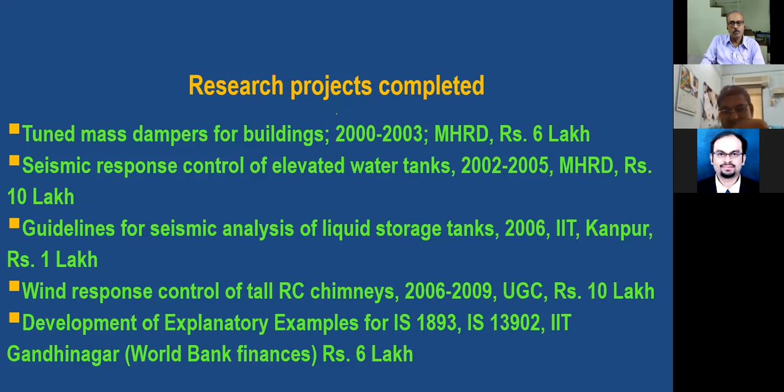He has completed many research projects too, which consist of tuned mass dampers for buildings in 2003 under MHRD, then seismic response control of elevated water tank, guidelines for seismic analysis of liquid storage tank, wind response control of tall RC chimneys, and development of explanatory examples for IS 1893 and IS 13920, from IIT Gandhinagar. His research interests are earthquake analysis of structures, tuned mass dampers, stability of shells, wind response of tall chimneys, elevated water tank, railway bridges, etc. He also completed consultancy projects such as design of a telephone exchange building at Bangalore, vibration testing for GI valve for nuclear units, NECO Industries, Nagpur, structural design checking of water tank for Government of Maharashtra, etc.

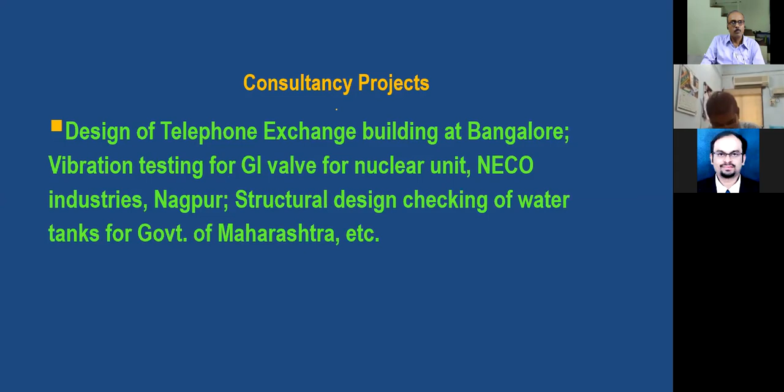He has membership with the Institution of Engineers, Indian Society for Earthquake Technology, Indian Society for Technical Education, Indian Association for Computational Mechanics, Indian Association for Structural Engineering, and VRC Alumni Association as well. Other achievements: he is a member of the Indian Standard on seismic design, as well as a member of the UG Admission Committee. He was a member of the Bureau of Indian Standards committee, awarded the INAE Fellowship for Mentoring Program in 2008-2009, and is an executive committee member of the Indian Society for Wind Engineering. He is in charge of UG Admissions and a member of the Core Committee of Central Counseling Board, VNIT Nagpur.

He was also head of the Applied Mechanics Department from 2010 to 2012. He was Dean Academic at VNIT from 2013 to 2016. He was also Professor in charge of the Student Mentor Program from 2016 to 2018. We are glad to have you with us, sir. So today's speaker, Dr. O.R. Jaiswal sir, and I would like to request sir to please start the session.

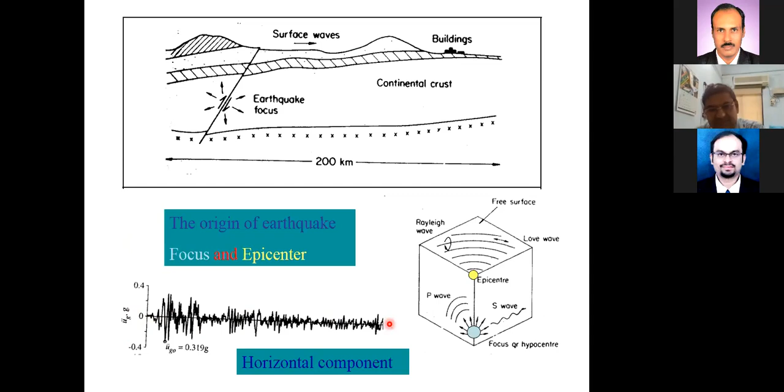This ground shaking, for our convenience, for engineering purpose, we divide into three components: two horizontal components and one vertical component. The horizontal components are more critical. Vertical component is also important, but the fact remains that dead load and live load are the loads in vertical direction already. So structure has already been designed for certain loads in vertical direction, that is dead load and live load.

Is it okay? Am I audible? Yes, sir, you are audible. It is very clear. Okay, good, good.

So already in vertical direction, we have dead load, live load. And in terms of acceleration, I can say that in vertical direction, structure has already been designed for 1g acceleration, because dead load is nothing but mass of the structure into 9.81 meter per second square. So over and above 1g, if there is some more ground shaking in vertical direction, the structure should be reasonably able to sustain it. That is the reason why we say that horizontal components are more critical to us than vertical component. But for long span structures, vertical component is equally important.

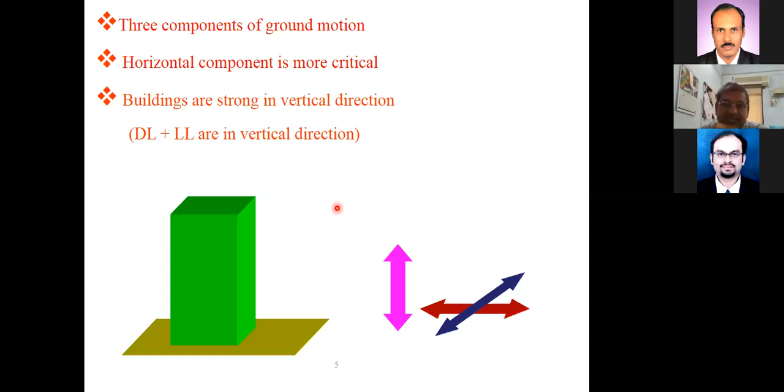So earthquake load on a structure is nothing but mass of the structure into acceleration. Which acceleration? Acceleration due to ground shaking. So if ground shaking is in horizontal direction, then FH, horizontal force acting on the structure, will be acceleration of the structure into its mass. This acceleration will come because of ground shaking. So we have to design the structure to reasonably sustain this much horizontal load. Since ground acceleration will be changing with time, structure's acceleration will be changing with time, this force will be dynamic in nature.

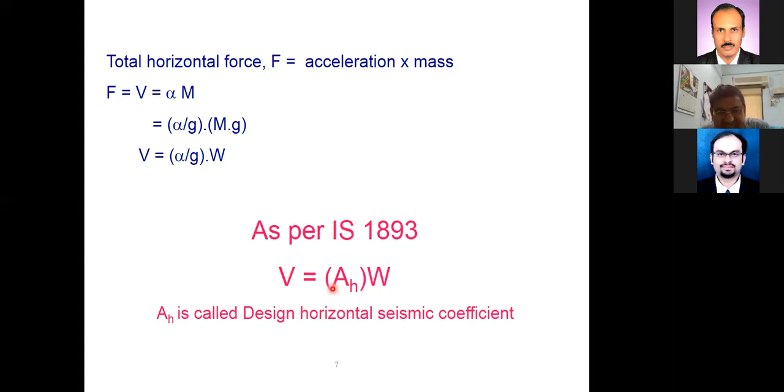So 1893 helps us in calculating this earthquake force which will be exerting on the structure. Now things are very simple. Newton's second law of motion, mass into acceleration. We divide acceleration by g, multiply mass by g. Mass into g is W. Alpha by g is a non-dimensional parameter. Alpha is acceleration, g is also acceleration. This same formula IS 1893 has given, that total earthquake force acting on a structure is nothing but, instead of alpha by g, they have written Ah into W. And this Ah is design horizontal seismic coefficient.

Since code has to be very general, that's why this Ah consists of three parts. Z by 2, that is zone. I by R is design philosophy. I is importance factor, R is response reduction factor, and Sa by g is structural characteristics. So this is given in IS 1893 part 1.

Now this IS 1893, its brief history is like this. First time it was proposed in 1962, then it got revised. First revision in 66, second revision in 1970, third revision in 75, fourth revision in 84, and fifth revision came in 2002.

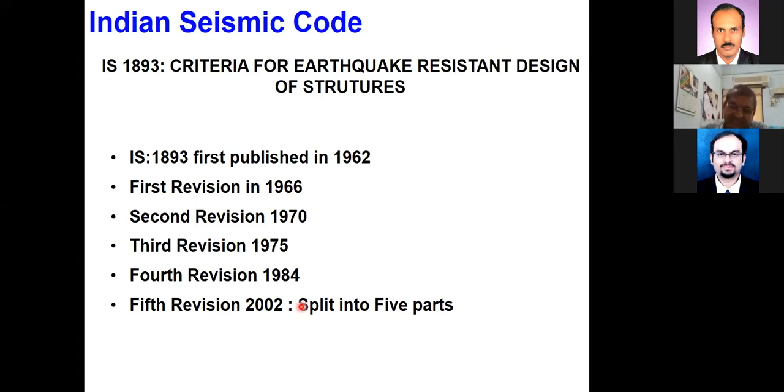And in 2002, this code has been split into 5 parts. For different structures, there are different parts. Part 1, which contains general provisions and buildings, was first published in 2002 and subsequently revised in 2016. Liquid retaining tanks, the code which we are going to discuss today, has been published in 2014. Bridges and retaining wall, part 3, has been published in 2015.

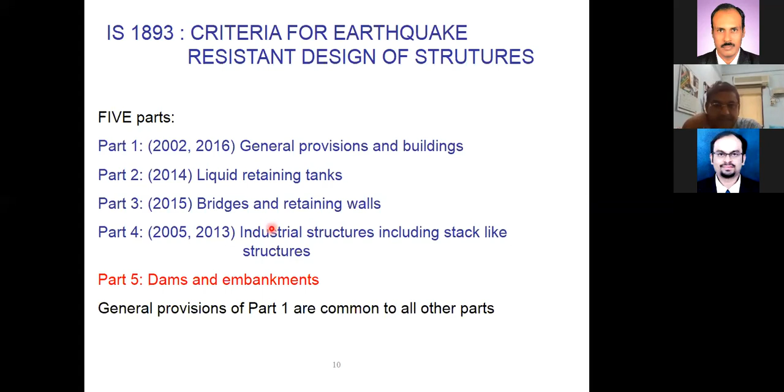Part 4, which deals with industrial structure, was published in 2005 and revised in 2013. Part 5 is written here in red color. It is yet to be published, but its draft is under circulation. In part 1, it's general provisions. They are common to all the codes. That means seismic zone map will be common to them, response spectra will be common to them, load combination, damping, those things will be common to all other parts. So while we are discussing part 2, we will take seismic zone map, response spectra, load combinations from part 1.

And in part 2 now, what we have to discuss, or what it has to contain separately for liquid storage tanks or for water tank, is importance factor, response reduction factor, and how to handle the sloshing or how to handle the liquid modeling. Those are the additional issues which we have to handle in this. So for buildings, we have this formula. In fact, this formula is common for all structures. So SA by G comes from response spectra.

To use response spectra, you should know time period of your structure. So once you know time period of your structure, then depending on which soil your structure is resting, you can read the value of SA by G. For building, time period is 0.09 H by root D, for building with infill. For bare frame, there are different formulas. Z comes from zone map. Zone map is given here. I is importance factor, R is response reduction factor.

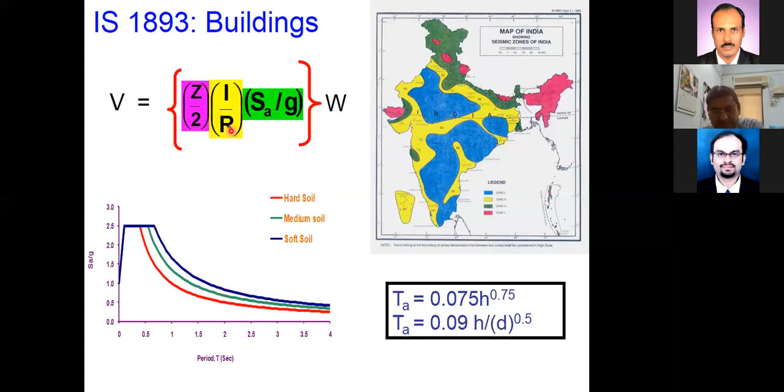Then for building, whatever total force we calculate, it is distributed to various floors in proportion to, or let us say in second order distribution or parabolic distribution, Wi Hi square, where Hi is the height of various floors from the bottom level. So that is how for building it is calculated. So for building, if somebody is using equivalent static analysis, things are like this. First you calculate time period, then go to response spectra, calculate SA by G, depending on that find out the Z value, depending on importance and characteristics of the structure get I and R and obtain this V or VB base shear, and then distribute vertically to various floors.

If somebody is doing response spectrum analysis, then first you have to model a discrete model of this building, and then find out the natural frequency from modal analysis. For different natural frequencies or natural periods, calculate the value of SA by G, and then calculate earthquake force at different levels in different modes, and then combine them using any modal combination. So two methods are given: one is equivalent static analysis, one is response spectrum analysis, for buildings. Now we come to part 2, that is for liquid storage tanks.

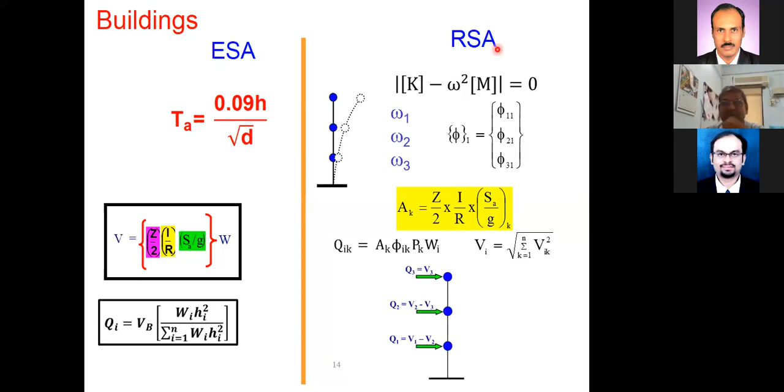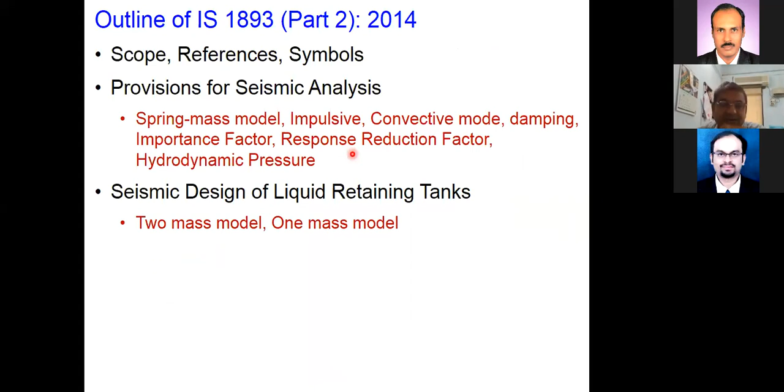This is the front page of this code. Now in part 2, what has been given: first it deals with the spring mass model, that is how to model the liquid, how to handle the liquid. During ground shaking, liquid will slosh, so convective mode. Damping, what will be importance factor for water tank, what will be response reduction factor, and hydrodynamic pressure, those things are given. Then there are some miscellaneous provisions like buckling of shells, buried tanks. And then there is a section on aesthetics. Water tanks are visible from a distance, so they should look reasonably good. And then there are some clauses given on quality control in RC tanks. Because they are important structures, some provisions are given here so that minimum quality of construction can be ensured for RC tanks.

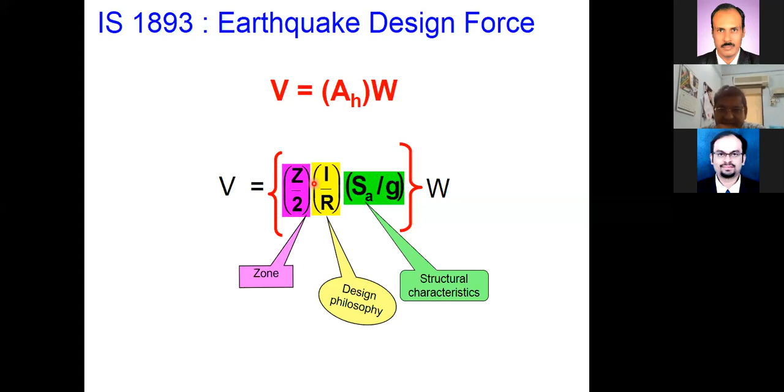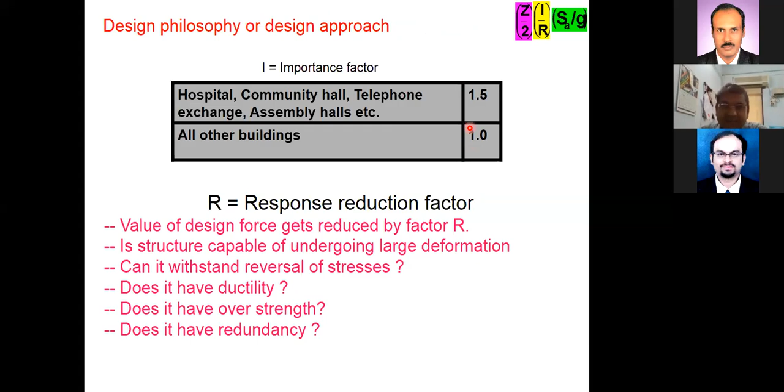Those are given. So earthquake design force, this we have seen. Now for buildings, we have seen I is 1.5 for important buildings, and it is 1 for other buildings. There is 1.2 also for community buildings with more than 200 people staying. And response reduction factor R for building, we have seen there are 2 values of R. For RC special moment resisting frame, that is those frames which follow 13920, R will be 5. If RC frame doesn't follow 13920 but follows only 456, then R value will be 3. But then for other types of brick masonry structure and other things, lower and lower values of R are given.

Now for water tanks, is it visible?

Yes, sir. Yes, sir. Okay. Because there was some change here, so I thought.

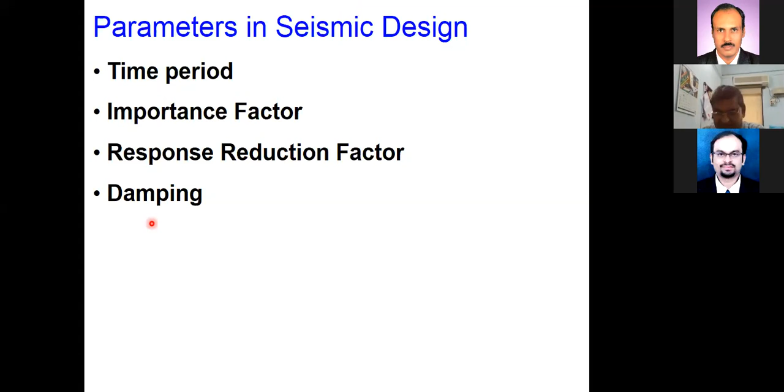Okay. Now for water tank, what will be the issues? Time period. Now 0.09H by root D can be used for water tank? It is only for building. Okay. Then what will be the time period of water tank? How to calculate it? Importance factor, response reduction factor, and damping issues for water tank.

So when water tank is subjected to ground shaking, liquid will slosh. Okay, so sloshing, you have to see how to calculate sloshing mass. Okay, then how to decide R values.

Now IS 1893 Part 2 has been published in 2014. Okay, and the document is largely based on the IITK GSDMA guideline. IITK means IIT Kanpur, and GSDMA means Gujarat State Disaster Management Authority. They together were involved in developing some seismic code-like documents, or guidelines. So one such guideline was devoted to water tank.

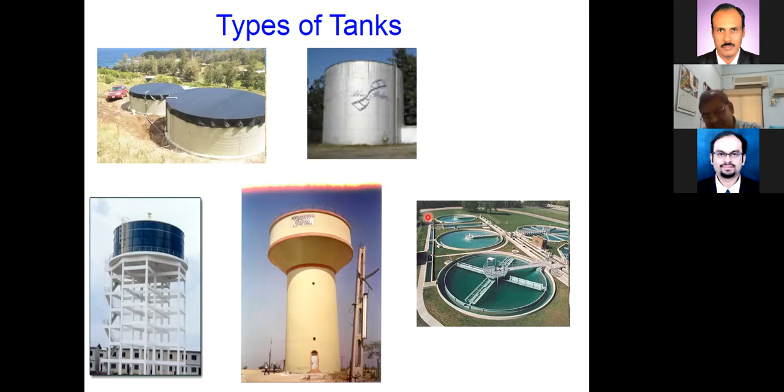Now, various types of tanks which are considered here: ground supported RCC tank, ground supported steel tank, elevated tank on RCC frame, elevated tank on shaft, and underground tanks. Largely these are the broad types of tanks which we have to address. Ground supported tank can be RC also, steel also. Elevated tank can have RC frame staging or steel frame staging. It can have RC shaft staging, and then underground tanks. Underground could be steel tank or it could be RCC tank also.

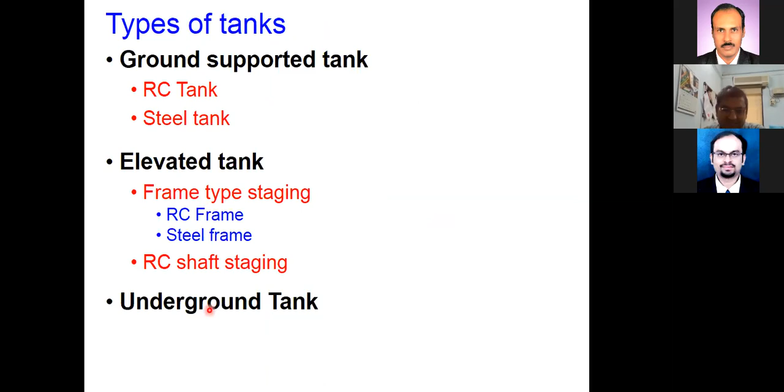Now, sloshing. Okay. So when there is ground shaking like this, the liquid will slosh. Top portion of the liquid will slosh. Now, because of this sloshing, what will happen? The wall will be subjected to dynamic pressure, sometimes this side, sometimes this side. So pressure on the wall will be dynamic in nature.

Okay, when there is no shaking, still there is a pressure on the wall, but that is hydrostatic pressure. But once there is a shaking, and the liquid sloshes or shakes, the pressure exerted on the wall will be hydrodynamic. In static condition, it is hydrostatic. So this is hydrostatic force, it linearly increases. And if the tank is circular, pressure acts in all directions, so the net summation of this pressure in any direction will be 0.

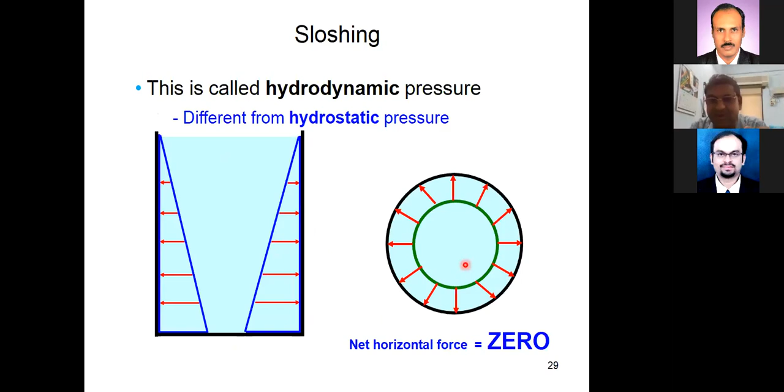So a static tank, let us say a water bottle kept on the table, is stable, because though there is a horizontal pressure on the wall, the horizontal pressure is in every direction. So it balances each other. But as soon as there is ground shaking, suppose the ground goes in this direction, the entire liquid will get pushed in this direction. The wall here will be subjected to additional pressure, and the wall on this side will be subjected to lower pressure. So once there is ground shaking like this, there is a hydrodynamic pressure on the wall.

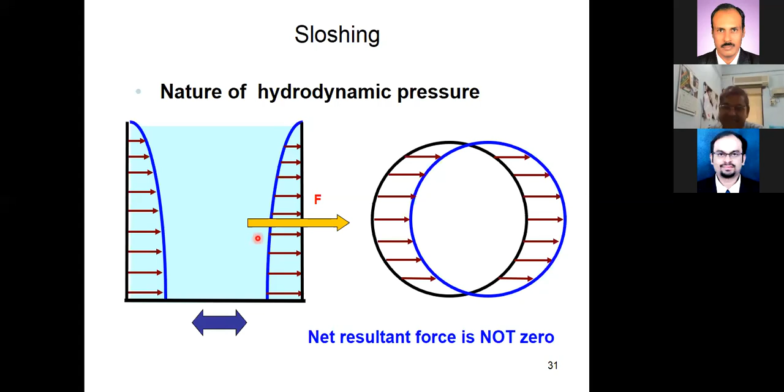If you take the summation of this hydrodynamic pressure, F, this is the force which will act on the wall because of the liquid. This is the pressure distribution in plan. Pressure at this 90-degree angle will be 0, and it will be maximum at this point and this point. So when there is shaking, the net horizontal pressure acting on the wall, its net summation won't be 0. So what happens when there is ground shaking? Liquid will slosh. Now, how much liquid will slosh? That we have to decide. Sloshing liquid is known as convective liquid, and there is some portion of the liquid which doesn't slosh. It remains like a rigid liquid.

It vibrates along with the wall. That is known as impulsive liquid. Okay, now this is water, let us say. Some portion is sloshing and the rest of the portion is not sloshing. Had this tank been filled with ice, there would not have been any sloshing. Then everything would have been impulsive. Ice would have moved along with the tank wall.

But since the shear resistance of water is 0, some water moves relative to the tank, okay, and this portion will slosh. Now, what we have to decide from an earthquake design point of view is how much liquid will slosh and how much pressure it will exert on the wall. Similarly, how much will be impulsive liquid and what type of force or pressure it will exert on the wall.

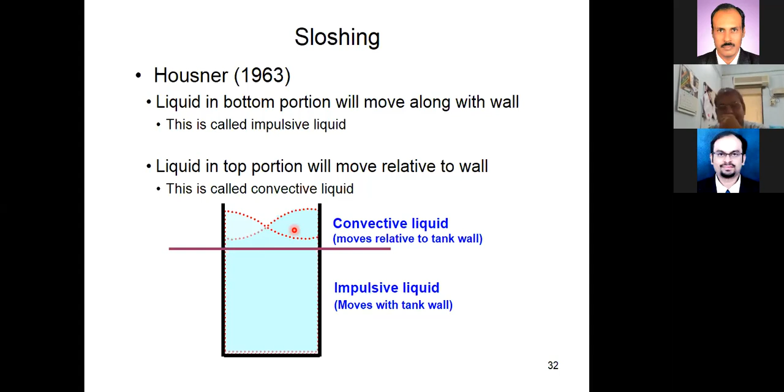Way back in 1963, Housner proposed a theory for this. Based on Euler, based on the Bernoulli equation of liquid and other things, they calculated how much liquid will go under sloshing and how much liquid will remain impulsive. So impulsive liquid will exert pressure something like this. Pressure increases as you go to the bottom. For the convective part, there will be more pressure on the top, and as you go to the bottom, pressure will reduce. So qualitatively, impulsive pressure distribution will be like this, and convective pressure distribution will be like this.

So these two liquid parts we have to calculate. What Housner proposed was that the total liquid mass M will get divided into two parts. One is MC, convective mass, and second is MI, rigid mass. Rigid mass means the mass which will vibrate along with the tank wall, and convective means the mass which will vibrate relative to that, the sloshing mass. The sloshing mass is attached to the wall with a spring, so there will be relative displacement, whereas the impulsive mass is attached with rigid rods, so it will move along with the wall. There will be some height at which MI and MC act.

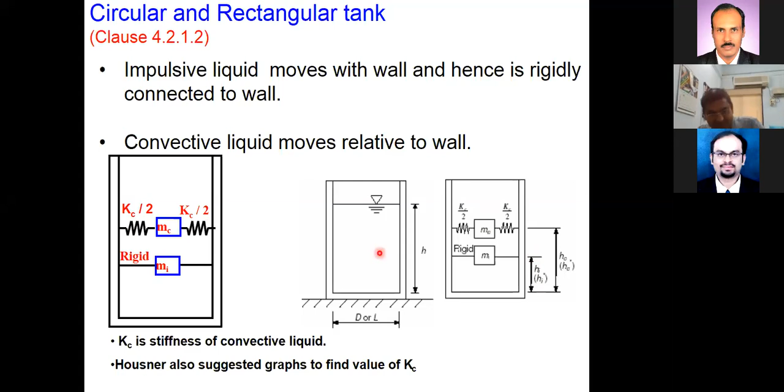This height will depend on where the resultant of impulsive pressure will act and where the resultant of convective hydrodynamic pressure will act. Now with all those calculations which Housner has done, some very simple charts have been proposed. What are these charts? H by D is on the x-axis. H is the height of the liquid, D is the diameter of the tank for a circular tank, and this solid line is MI by M. This dash line is MC by M. So if your H by D is 1, then you will have this much MC by M value, and this much value of MI by M.

However, in the IITK-GSDMA guidelines, a formula for MI by M is also given. This formula was derived by Housner. So if somebody is having design Excel sheets, you can directly add these formulas, so that for a given H by D, you will directly know MI by M and MC by M.

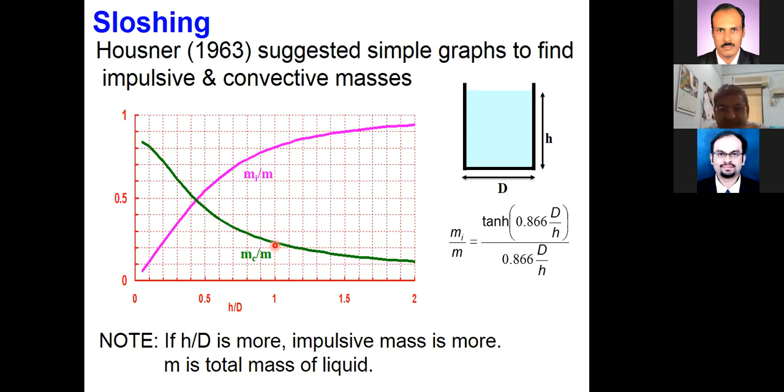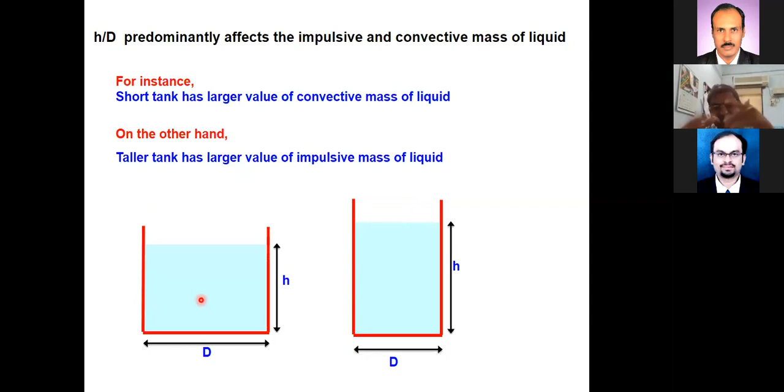If H by D is more, MC by M reduces and MI by M increases. So for taller tanks, the sloshing liquid is less. For shallower tanks, the sloshing liquid is more. That is obvious: if the water depth is less, then more sloshing will occur. So that is how this goes.

So this whole hydrodynamic pressure distribution can be obtained, as I said, and the resultant of that pressure will be this. And this will act at height HI. Similarly, the sloshing or convective liquid will act at height HC.

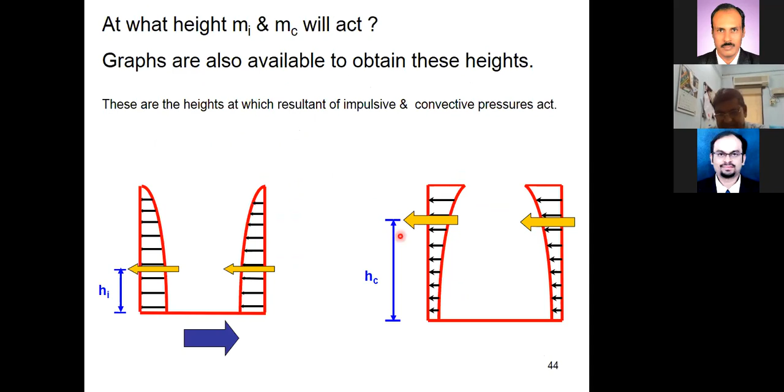Now there is one more issue involved in the sloshing business. Suppose the ground moves in this direction, the entire liquid goes in the opposite direction. While the liquid goes in that direction, the vertical pressure on the slab also changes. There will be more vertical pressure on this side and less on this side. So as far as overturning of the tank is concerned, or the net horizontal moment on the tank wall, there will be a net horizontal force which will give rise to an overturning moment.

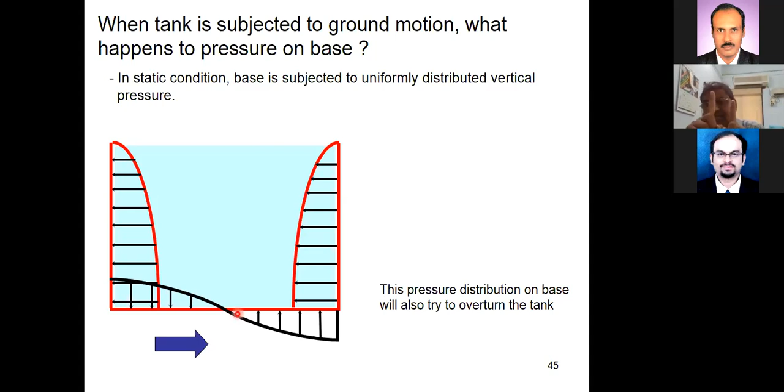Similarly, because of this differential pressure distribution on the horizontal slab, there will be equal and opposite forces acting, which will also add to the overturning. So there are two heights given.

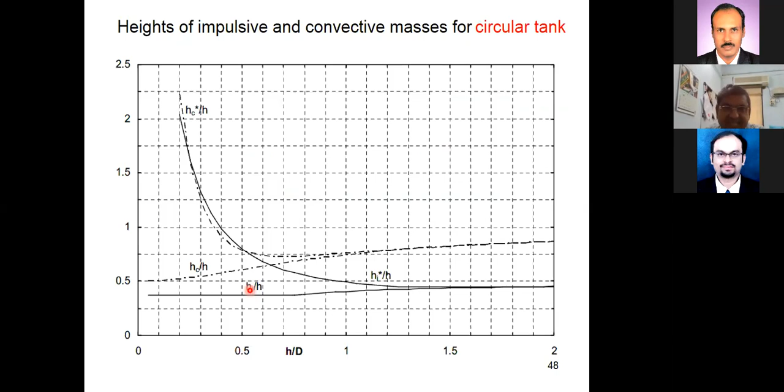One, including the base pressure, the height at which the impulsive force will act is HI star, or if you neglect the difference in vertical pressure on the slab, then it is HI. So HI and HI star, two heights are given, and it is related to the inclusion of the difference in vertical pressure on the horizontal slab, which leads to the overturning tendency of the tank. So graphs are given for calculating HI, HC, HI star, HC star. Formulas are also given for them.

So once this liquid model is ready, what does ready mean? You know MI, you know MC, you know KC, you know HI, HI star, HC and HC star. Everything is known either from those graphs or from the expressions given. Then the rest of it is the same as what we have done for buildings. Total force is mass into acceleration.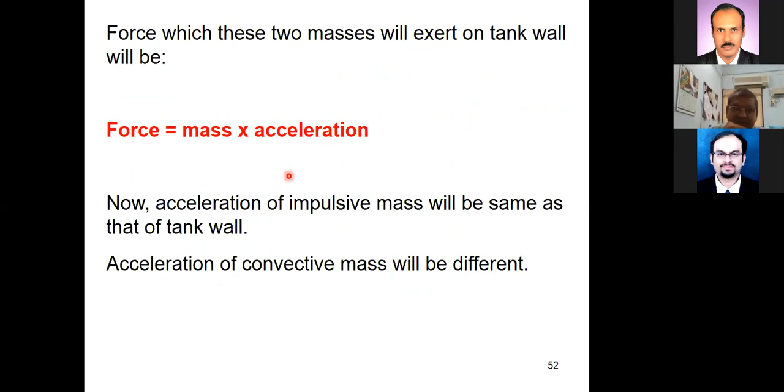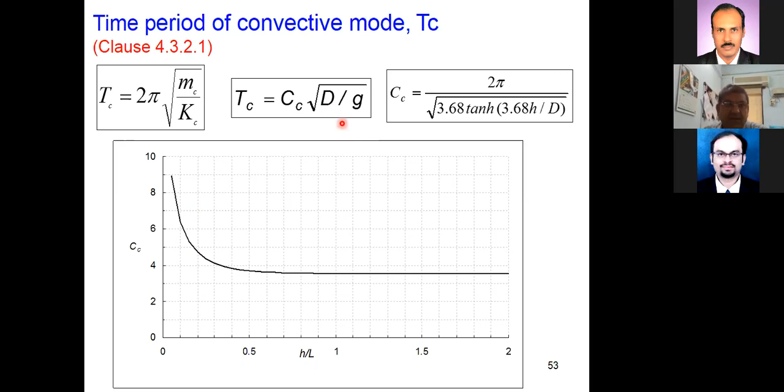Now this formula is based on shell theory. For a circular cylinder filled with liquid, you can derive the formula for its flexibility or its natural frequency or natural period. So this formula should be used when the tank is full. There should not be much difference between the height of the tank and the height of the liquid. So this formula cannot be used if only 50% liquid is present. This is for the tank full condition.

That is for a ground supported tank. For an elevated water tank, the time period will be given by 2 pi under root m by k, the classical formula. Now what is m? M here consists of Mi, that is the impulsive mass, plus the structural mass of the tank, and Ks is the stiffness of the staging.

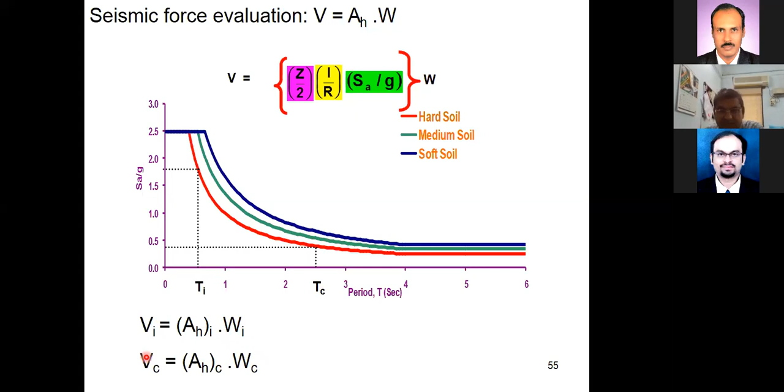Once you know the time period of impulsive mode and time period of convective mode, you can read the value of Sa by g for both of them. Once you read the value of Sa by g, you can calculate Ah corresponding to impulsive and Ah corresponding to convective, multiply them by respective weights. Wi is impulsive weight, Wc is convective weight, and then you will get two horizontal forces, impulsive force and convective force. Then add both of them using SRSS.

Where they are reasonably well separated, SRSS can be used. SRSS means square root of sum of squares. So Vi and Vc need to be combined like this using SRSS. So we have these two masses, and the time periods are different for elevated tanks. Now we will talk about how to calculate time period of elevated tank. This previous formula which we have is this formula.

Now in elevated tank, this is the schematic representation. You have Mc, you have Mi. Now, in addition to Mi, you have weight of the container, you have weight of the staging. Basically, Ks is the stiffness of the staging, and Kc is the stiffness of the sloshing. So it is actually a 2 degree of freedom system, but since sloshing time period is very large as compared to impulsive time period, there is an approximation.

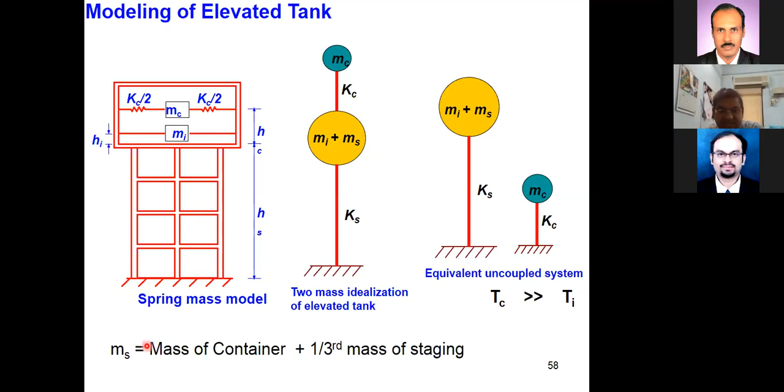This 2 degree of freedom system can be treated as 2 single degree of freedom systems, where Mc and Kc are fixed at the base, and Mi, Ms, and Ks are another. This is a reasonable simplification if Tc, that is time period of sloshing, is larger than Ti. And this Ms is mass of container plus 1/3 mass of staging. Ks can be obtained from simple structural analysis. You apply force P on the staging, calculate delta. So P by delta is the stiffness of staging. Lateral load analysis will have to be done to calculate stiffness of the staging.

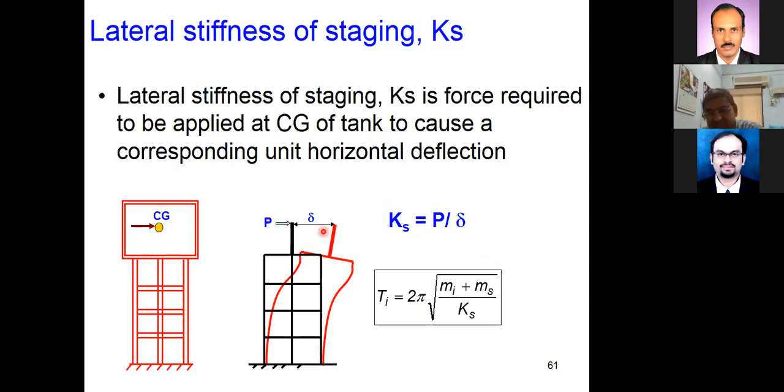Now see, in building we had a very simple formula, 0.09 H by root D. That formula is not applicable for water tank, obviously, and for water tank there is no such simple formula. So for water tank, you have to calculate the time period from the basics of structural dynamics. That is, natural frequency is under root K by M, and time period is 2π under root M by K. So obtain K from static analysis, wherein you apply a force at the center of gravity and get the delta at center of gravity. Once you know stiffness, Mi is known, structural mass also can be obtained. So the difference between time period of elevated tank and building: for building there is an empirical formula, whereas for water tank you have to calculate it using the fundamentals of mechanics.

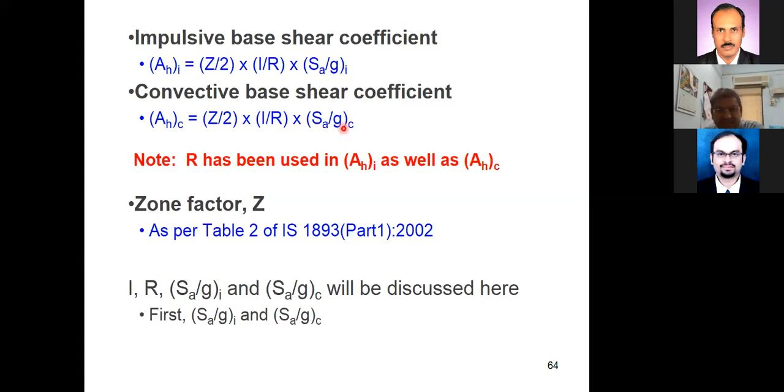Now once that is done, then you have two forces, Ahi, impulsive, and Ahc, that is because of convective, and both these things should be added. Now one issue will come here, damping. For impulsive mode, the way it is written in the code, this code was in 2014. Please note down, after 2014, in 2016, part 1 has been modified. So whatever changes have taken place in part 1, they will come in part 2 only as and when the next version of part 2 comes. So this 2014 version of part 2 is based on 2002 version of 1893 part 1.

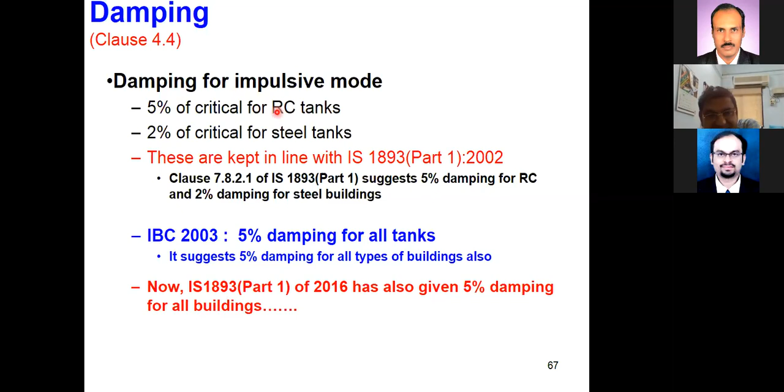Therein it was written that for RC tanks it should be 5%, and for steel structures damping should be 2%. But in the 2016 version it says 5% damping for all types of materials. So here damping for impulsive mode as per present code will be 5% for RCC, 2% for steel. And for convective mode, 0.5% damping. See, sloshing of liquid has very less damping, and that doesn't depend on tank material, whether steel tank or RCC tank or any other material, sloshing will be same. It depends only on geometrical ratio, and its damping is 0.5%.

So for 0.5%, there is a 1.75 multiplying factor. Our 1893 spectra is given at 5% damping. So for other damping ratios, there is a table, of course, now this table is not there. Otherwise, for 0% damping, multiplying factor is 3.2. For 2% damping, multiplying factor is 1.4. For 5% damping, multiplying factor is 1, obviously.

For 7%, 0.9; 10%, 0.8, like this. So if damping is more, the multiplying factor is less. Otherwise, whatever response factor is given is for 5% damping. So in water tank sloshing, we have to take 0.5% damping, somewhere in between this. So our value should be between 3.2 and 1.4. So 1.75 has been given. So that will have to be multiplied.

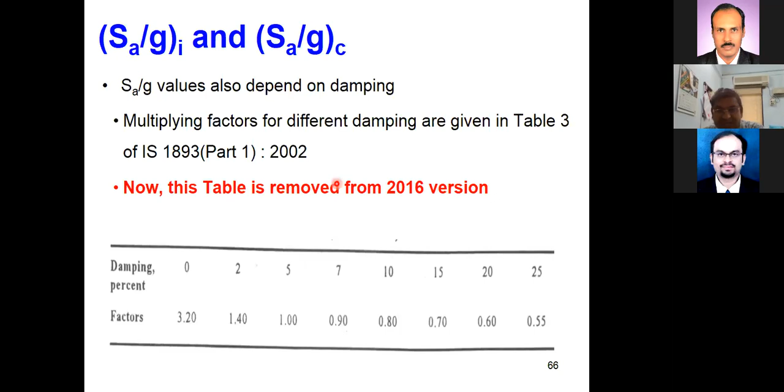Because when you calculate Sa/g corresponding to the convective part, this Sa/g will have to be multiplied by 1.75. Now, for the importance factor, two values are suggested. If the tank is important, it is containing some hazardous material, or it is for firefighting services, or post-earthquake needs are there, then 1.5, otherwise 1.

Then the R value. Now the R value for an elevated tank. We start with the elevated tank. If the elevated tank is resting on a moment resisting frame, and if the moment resisting frame is SMRF, then the R value is 4. If it is on OMRF, then the R value is 2.5. So these corresponding values for buildings were 5 and 3. So for a water tank, it is 4 and 2.5. That is what is given in the code.

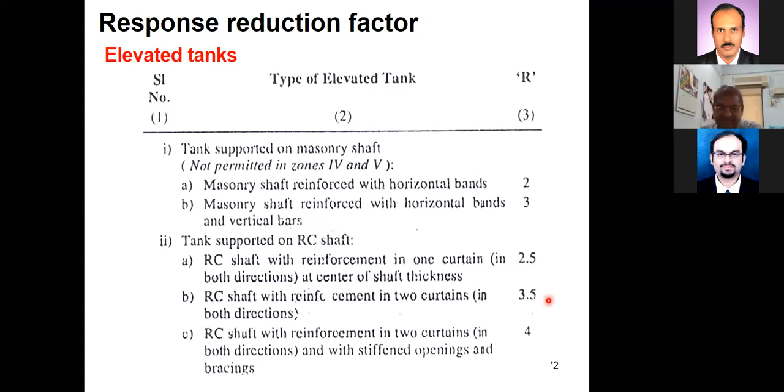For elevated tanks on RC frame. If there is an elevated tank which is resting on a shaft, an RC shaft, that is an Intze tank, then depending on how that shaft has been detailed, if it has only one layer of reinforcement, then the R value will be 2.5. If it has 2 layers of reinforcement in the shell on both the faces, then 3.5, and things like that. So the R values in Part 2 are a little bit less than what is given for buildings. There is a reason for that. We'll quickly discuss that.

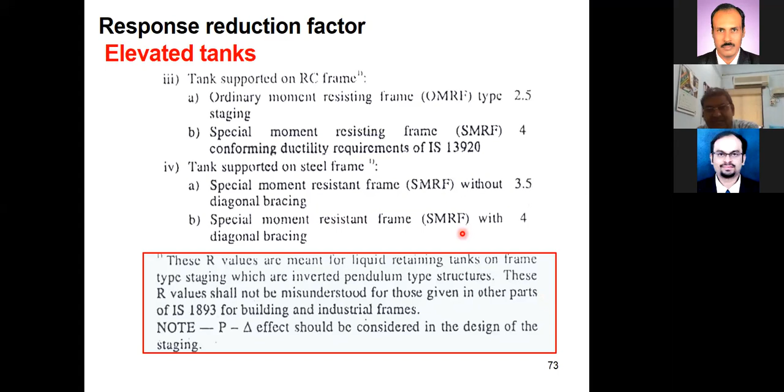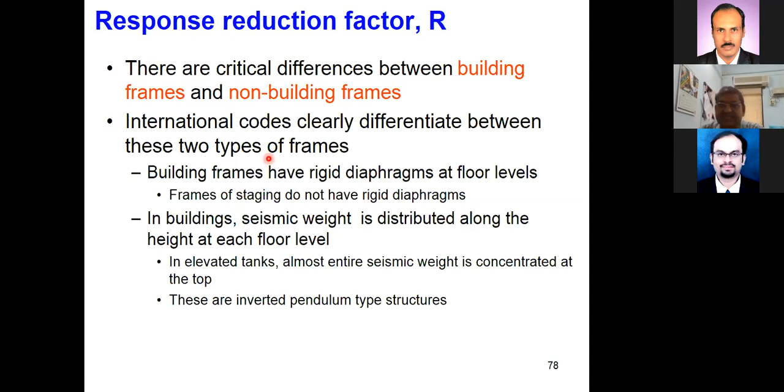Then for ground supported tanks, R values are also given. Now the R value depends on ductility, redundancy, and overstrength, which is the discussion we have seen in buildings. And obviously in buildings there are walls, and there are slabs at every level, and those things do not exist in water tanks. In a ground supported water tank there is nothing to dissipate the energy, that's why R values are less. In an elevated tank it will be only the RC frame or the shaft which will have to consume the energy, and they have very little ductility. So that is why R values are less. But this IITK-GSDMA document gives still lower values of R.

That is one of the major differences between Part 2 and the IITK-GSDMA document. Though the methodology is the same, the spring mass model and all those things are the same, these R values are different. And there are reasons for that. We won't go into details of that. If you compare our code with other international codes, we'll find that in all other international codes, the design seismic forces for tanks are 2.5 to 3 times higher than the design forces for buildings. So if you follow that logic, then our R value should be as low as 3 or 2.5.

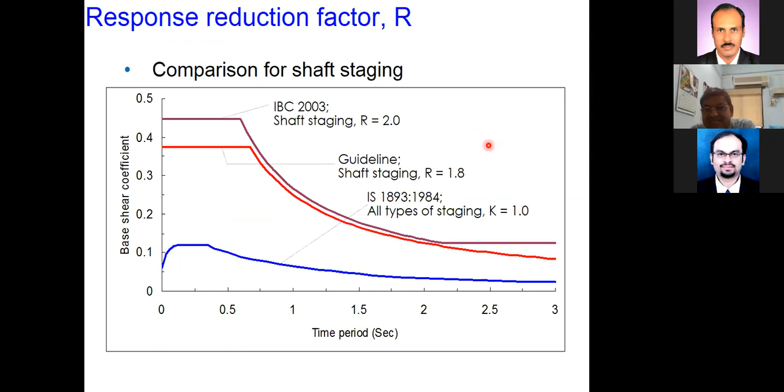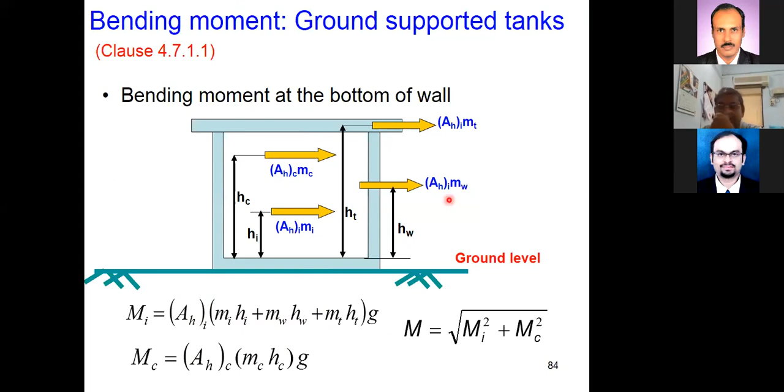Fine. Once all these calculations are done, Ah_i into all the impulsive masses and Ah_c into convective masses, then you calculate the force corresponding to everything. This is the force corresponding to the top roof slab, Mw is the force corresponding to the wall, Mi is the impulsive liquid, Mc is the sloshing liquid. And then calculate the moment corresponding to each one, like Mi will be multiplied by hi, Mw will be multiplied by hw, the center of gravity of the wall, and things like that, and calculate the total overturning moment. Like this. This is for a ground supported tank.

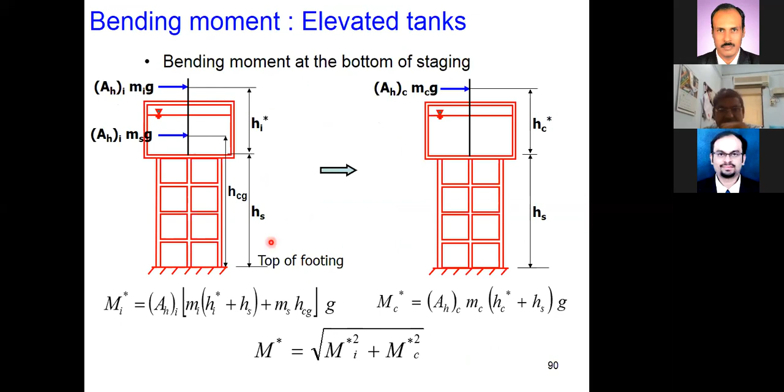Similarly, for an elevated tank also we can do that. Now see, in elevated tanks the base slab is here, so that will also be subjected to differential pressure. So we will have to use hi* and hc* rather than hi and hc. And then calculate the total overturning moment at the base because of the overturning moments produced by them. So that can be calculated.

Now, load calculation for a water tank has one major difference: the inclusion of sloshing. Because of sloshing, we have Mc and Mi, and because of that there are 2 horizontal forces, and they have to be properly combined, or the overturning effect because of both of them will have to be properly calculated. Now another additional thing for seismic analysis of a water tank is that the tank should also be analyzed for the empty condition.

Okay, it is true that in empty condition the weight of the tank will be less, but then its time period will also get reduced, because the time period is 2 pi under root m by k, and mass is less. So you may have more Sa by g value. That should be properly analyzed for the empty condition also.

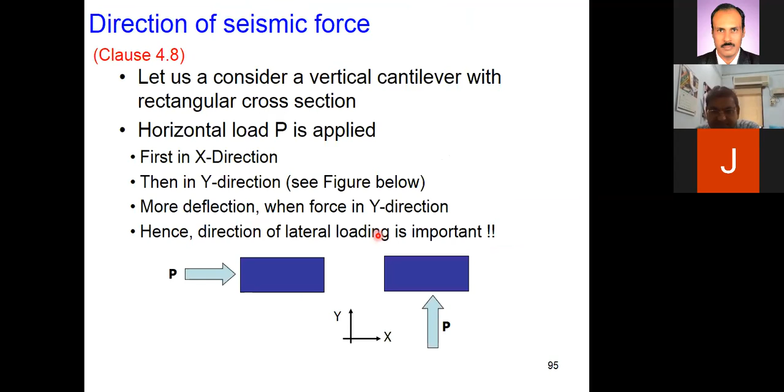Fine. Now, direction of the earthquake force. In buildings, we have seen that if building frames are orthogonal to each other, then you should apply only x direction force once and then y direction force once. They need not be added together. For a water tank, what does the code say? We should apply the earthquake force in the critical direction. Now, what is the meaning of critical direction? Pictorially we will explain like this.

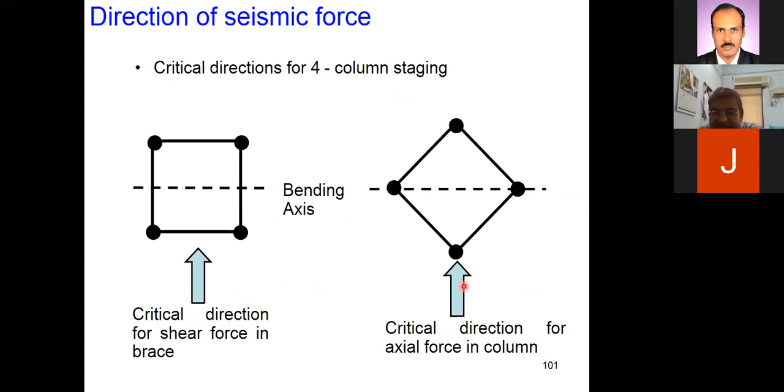Suppose there is a water tank with these 4 columns. If you apply earthquake force in this direction, you will get maximum force in bracings, in these beams. If you apply force diagonally like this, then you will get maximum axial force in columns. So for column design, you will have to apply earthquake force in this direction. For brace design, you will have to apply it in this direction. Similarly, for 8 column staging, there will be one critical direction for brace, another critical direction for column. So if you have some arbitrary configuration of staging plan, you will have to check for which direction things will be critical. The critical direction for column could be different from that for braces, so that care should be taken.

Otherwise, it says you can apply the 100-30 rule. Apply 100% in x and 30% in y, and then go ahead with the SRSS rule. Or you can use SRSS also, full x, full y, and the square root of the sum of their squares. Now, there is a series of formulas given in this code to calculate the pressure.

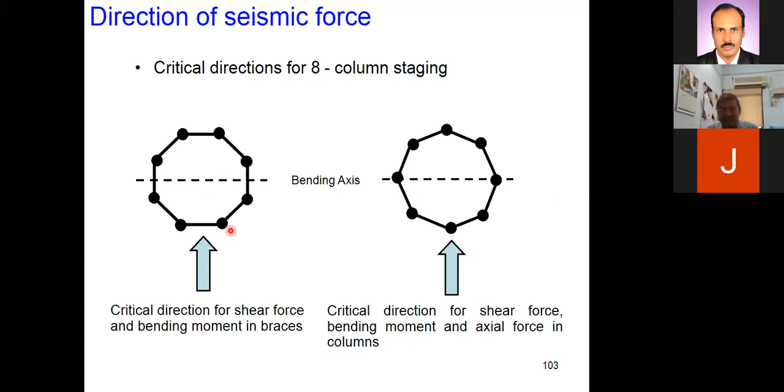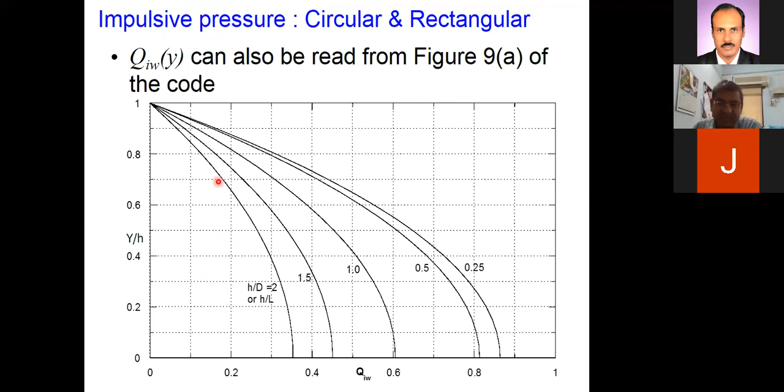Now, whatever we have calculated so far is the earthquake force and where that force should be applied. That was the discussion so far. Now, pressure will be exerted on the wall. So various graphs are given for different H by D values, showing how much the hydrodynamic pressure on the wall will be because of the impulsive nature, and similarly because of the convective nature. These are given for circular tanks as well as rectangular tanks. Then the pressure distribution on the base slab is also given.

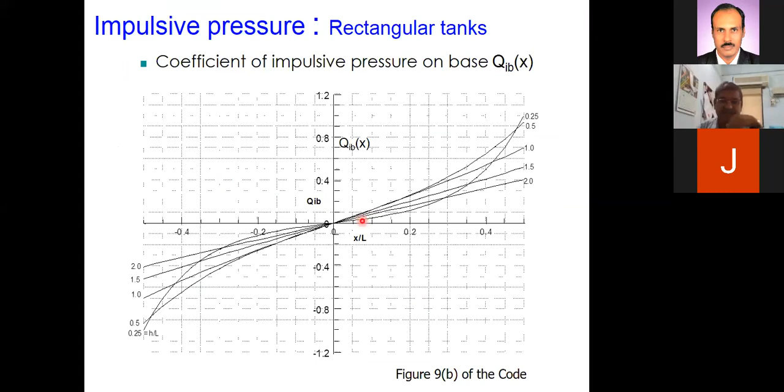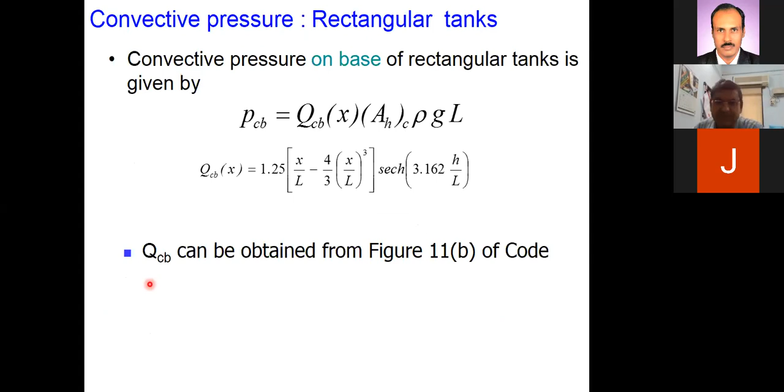On the horizontal slab, how pressure will be exerted, for that also a series of graphs are given, for circular as well as rectangular tanks. Impulsive pressure distribution as well as convective pressure distribution on the wall is given. This is convective, which has more value at the top level and becomes very less as you go to the bottom. Similarly, convective pressure on the slab is also given. I won't go into the details of these formulas. They are given for circular as well as rectangular tanks.

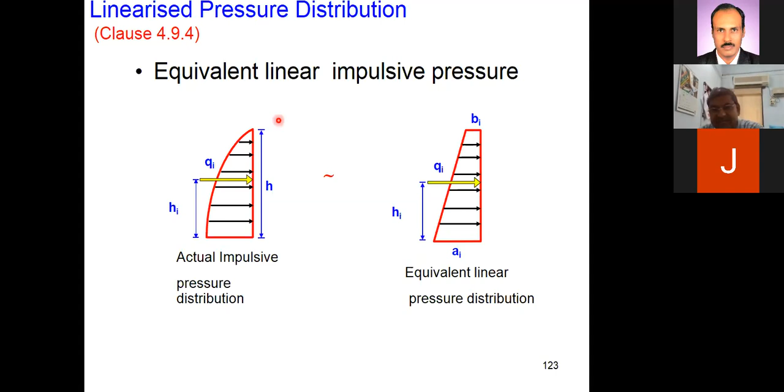Now, once you have this kind of pressure distribution on the wall, for wall design we use IS 3370. In IS 3370, moment coefficients and shear coefficients are given for uniform pressure on the wall and for triangular pressure. So this parabolic distribution is converted into an equivalent trapezoidal distribution, so that the area under this and this should be the same. And similarly for convective, this type of trapezoid, and all parameters required are given: BC, AC, QC. This is AC, this is BC, this is QC.

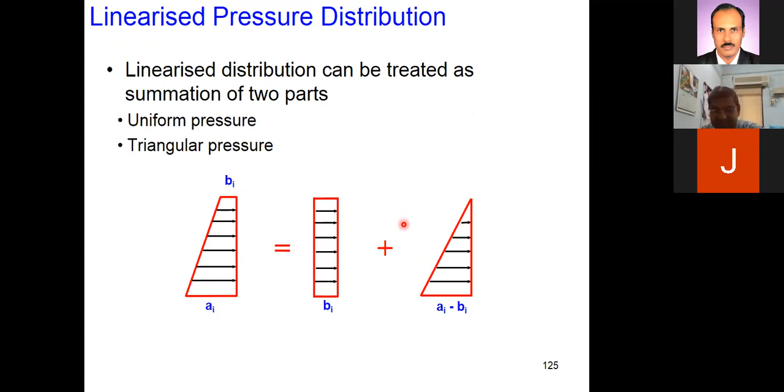All those can be calculated, because you know the original distribution, so you know the area of that graph. So this trapezoid is divided into one uniform plus one triangle. And for both these cases, the bending moment calculation can be done using IS 3370 because those coefficients are available, for hoop and for radial direction.

Then the rest of it is all smaller things which are given. Vertical pressure you can account for. The liquid weight will have to be increased or decreased depending on the direction of the earthquake. There will be an inertia force on the wall, which can be included. And then all these impulsive and convective components can be combined. So the total pressure which you will use for designing the wall can be combined using SRSS: convective square plus vertical square plus impulsive square. Now, in impulsive, water and wall are both added.

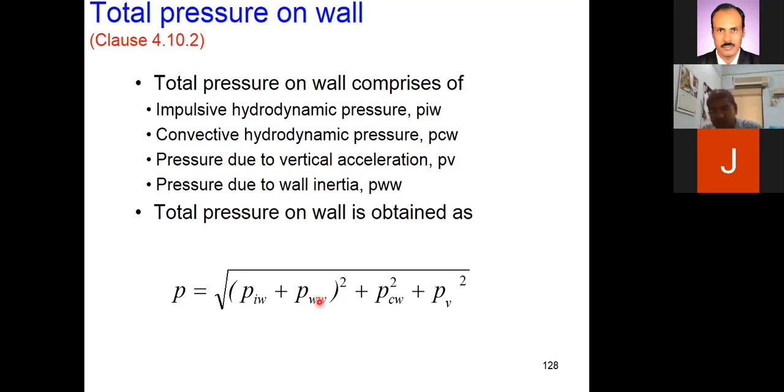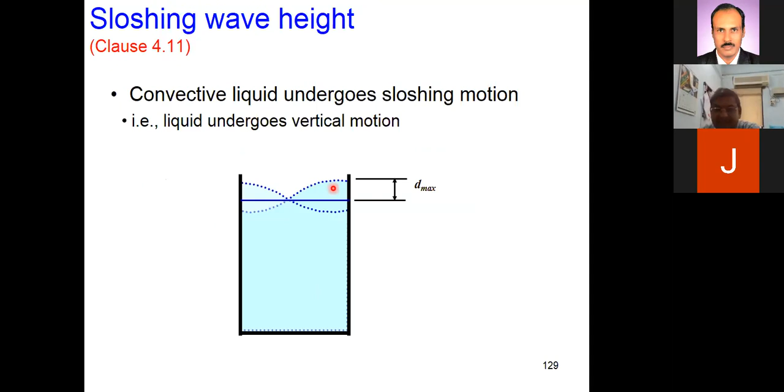Then there is a formula to calculate sloshing height. So how much freeboard should be provided in the water tank? That should be more than this d max sloshing height. Sloshing height will be nothing but Ah of convective component into response reduction factor into D by 2 or L by 2, depending on whether it is a circular tank or rectangular tank.

Here, what the code says is that this two mass idealization need not be used every time. It is very simple, so there is no need not to use it. But if tanks are of smaller size, then one can use the entire liquid as impulsive. That is what it says.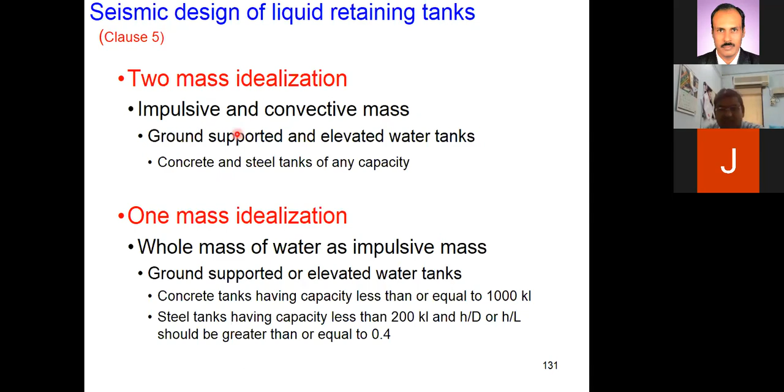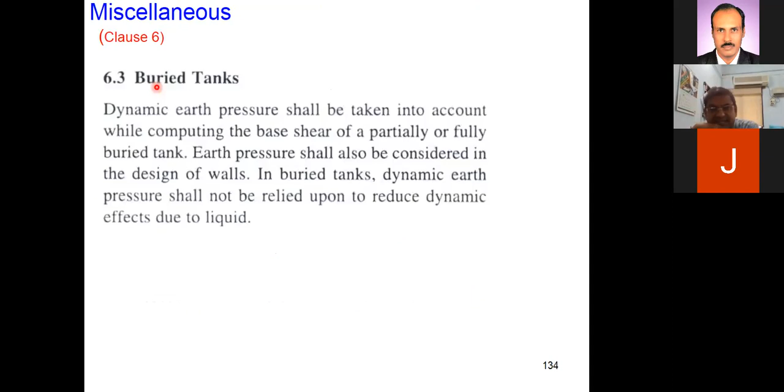Then there are miscellaneous clauses on piping. Wherever piping meets the tank, at that joint damage occurs during ground shaking. So how to take care of that? Buckling of shell: steel tanks supported on ground are susceptible to buckling during shaking. Buried tanks. Then shear transfer from container to staging portion, that jointing should be very good because shear will be transferred there.

Aesthetics. Elevated water tanks are prominently in public view. They are visible from long distances. They become a landmark on a particular landscape. Hence, their forms and shapes other than rectangular should be encouraged. As structural engineers, we tend to have very regular geometries. So IS has put this clause just to say that we should not be very rigid. If other shapes of container come to you, suitably do their analysis and design them.

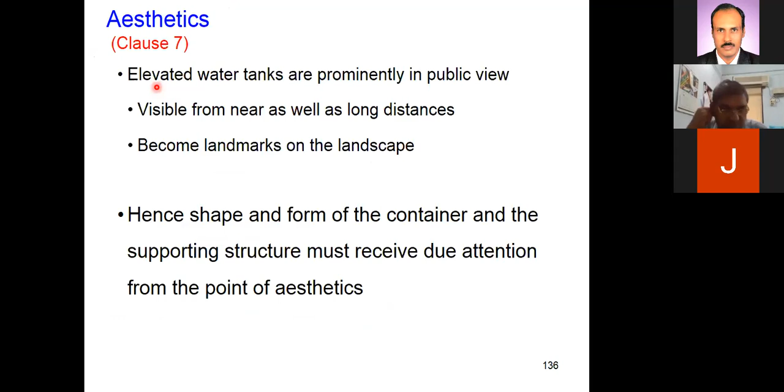Then quality control issues. As I said, quality control strictly is not in IS 1893's scope, but realizing the fact that these are very important structures and they have to be constructed using special provisions, special centering, special provisions are required for construction of the container also. So some clauses are given. I will just flash one or two of them. Let us say for RC frame staging, minimum column size should be 400 mm.

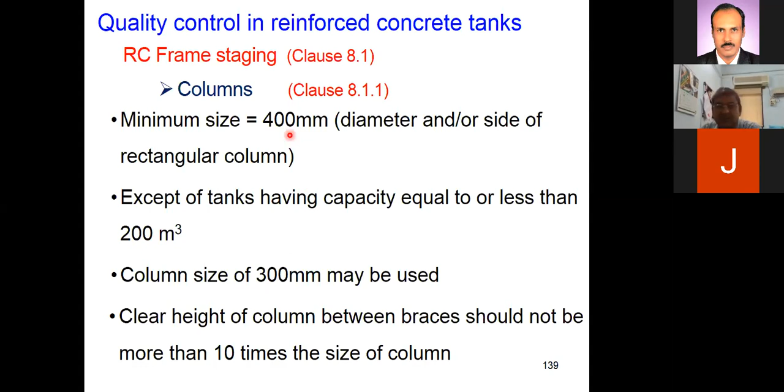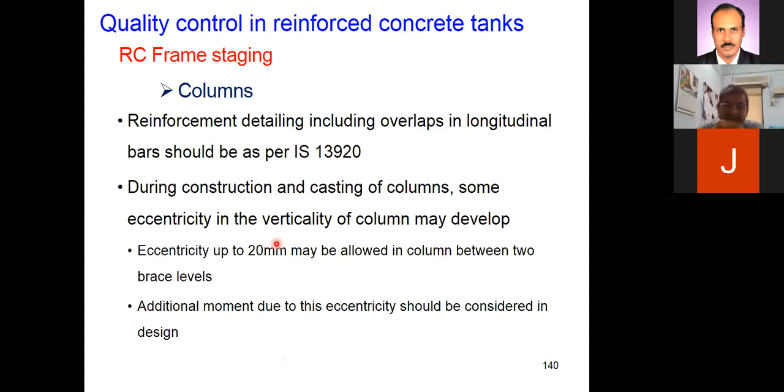If the water tank is small, smaller than 200 meter cube, then column size will be 300, but it should never be less than 300 mm, preferably not less than 400 mm. Reinforcement detailing should be done as per 13920. In the vertical direction between two brace levels, a column should not go out of plumb by more than 20 mm. Another clause for braces: minimum width of brace shall not be less than 1/30th of its clear length. Whatever is the length of the brace, its width should not be less than 1/30th of that.

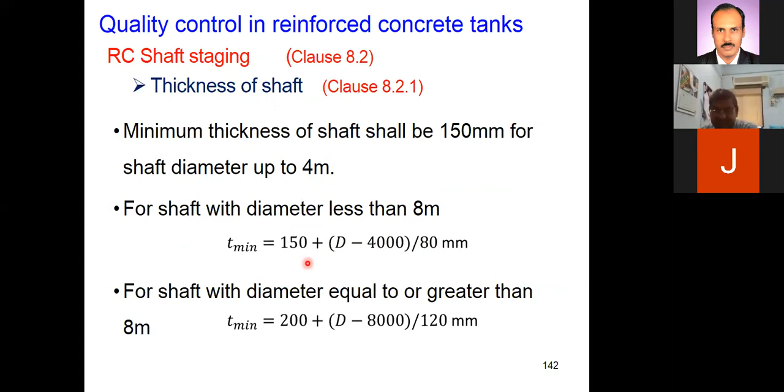Then for shaft, minimum 150 mm thickness should be there, up to 4 meter diameter. Then up to 8 meter diameter, 150 plus D minus 4000 divided by 80. So as the diameter of the shaft increases, its minimum thickness also increases. Then how reinforcement should be provided in shaft. So this type of quality control in construction is given: circumferential bars in a shaft, and vertical bars, there is minimum spacing and things like that, development length LD. These provisions for quality control are given.

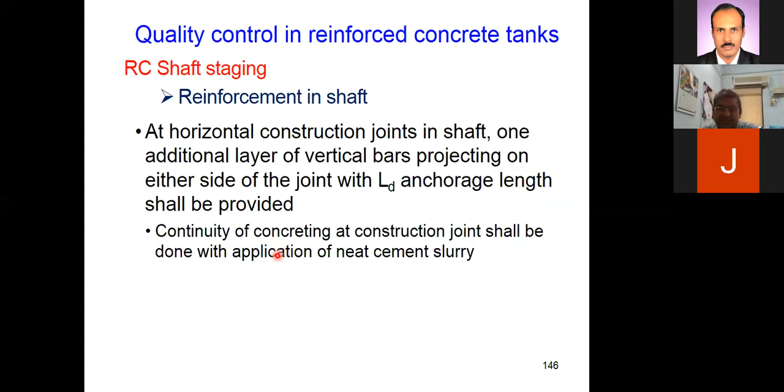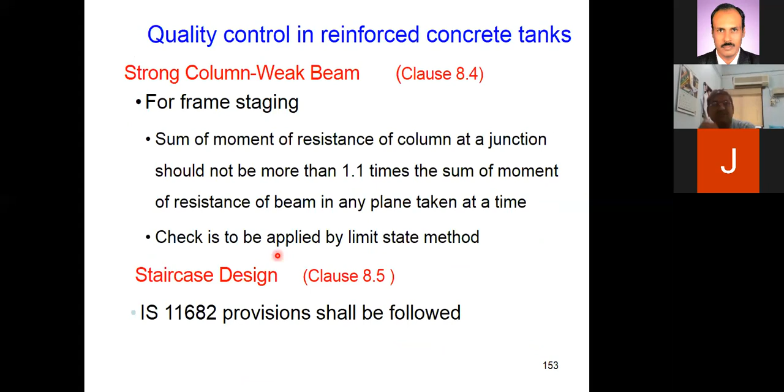So with that, we will come to the end of this discussion. Strong column, weak beam. To conclude, we'll say that between buildings and liquid storage tanks there are certain differences. The main difference is in terms of sloshing, because in a liquid storage tank, liquid will slosh. So sloshing should be properly accounted for. So weight calculation changes, time period calculation changes.

There are two time periods now: impulsive time period and convective time period. That is how load calculation becomes different. R values obviously are different for water tanks, depending on what type of tank it is: buried, ground supported or elevated. Critical direction for the water tank should be ascertained. Hydrodynamic pressure on the wall should be properly calculated, and then using IS 3370, the wall should be designed.

And sloshing height provisions, to calculate the sloshing height of the liquid when it will slosh, so that the liquid doesn't hit the roof slab. So that's all. With that we conclude. And then if there are questions, I'll take them up.

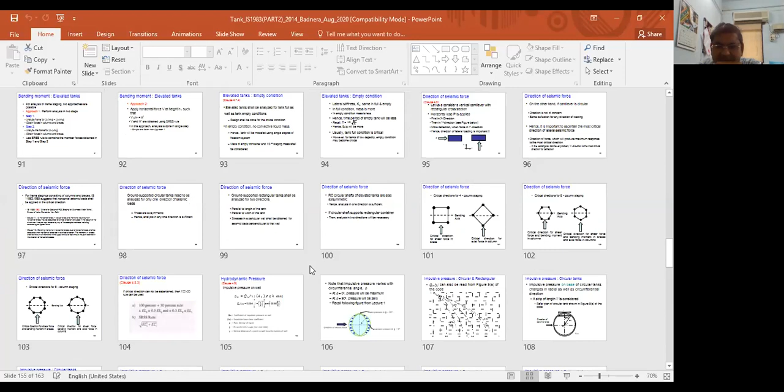Minimum number of columns obviously have to be 4, isn't it? But it depends on the configuration, because of the consideration of the torsion. Not only because of consideration of torsion, torsion mode should be avoided. You are able to see the screen, this one with 6 columns, then there is one with 8 columns, and then this 4 column. So these are the typical ones. But then you have others also wherein there are columns inside the periphery also.

Torsional mode should be avoided not only in elevated water tanks but also in buildings. It is not a game of just number of columns. It will be the game of how columns are configured, what is the plan shape of that. So there is nothing written that if you have a minimum this many columns, then torsion will be avoided. Minimum number of columns and their sizes will be dictated by tank capacity, soil condition and staging height. But torsion should be avoided.

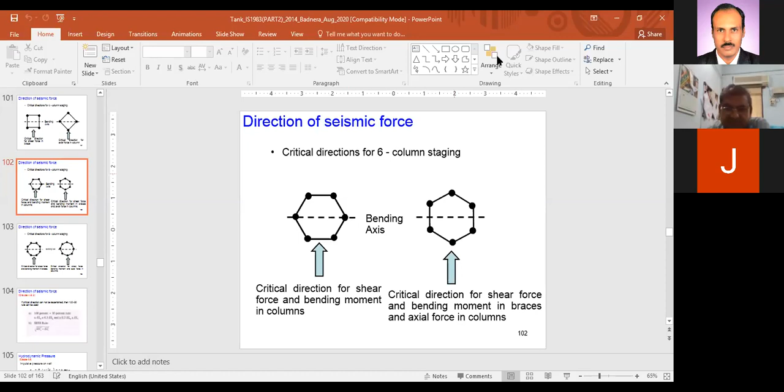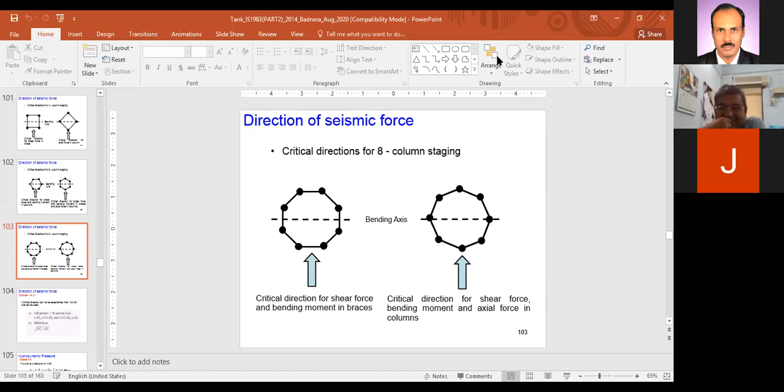Actually, normally it is a symmetrical structure. We assume that there will not be any torsion, but there is this one IIT Kanpur paper, I think by Professor D.C. Rai, that in the Jabalpur earthquake there were many water tanks which failed in torsion. So they have prescribed some provisions. In Jabalpur, there was a water tank on shaft which got damaged. Shaft tanks, shafts are circular. But for frame staging, no.

If there is a staircase present on one corner and it is rigidly attached to the staging, then it leads to torsion. It leads to unsymmetrical behavior. Even though your staging geometry is symmetrical, because of the presence of the staircase, it leads to unequal distribution of stiffness and mass, and that is where the problem comes. So that type of thing should be detached. There should be a gap between the staircase tower and the main water tank. So those kinds of precautions should be taken. Okay, thank you.